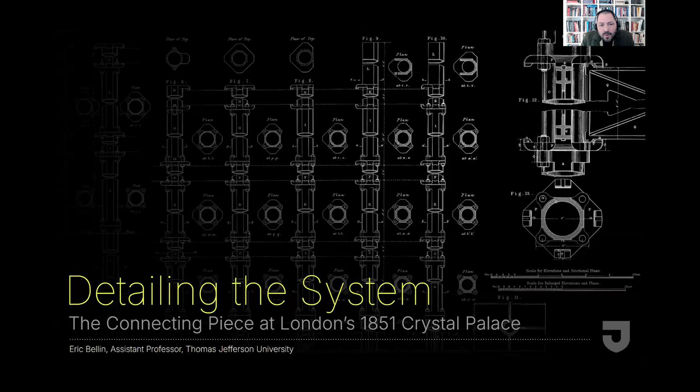So today, I'll talk about one particular detail of the Crystal Palace, the famed iron and glass building constructed in London's Hyde Park for the 1851 Great Exhibition of All Nations. And the detail I'll discuss is centered on a particular building component, a part that the project designers simply called the connecting piece.

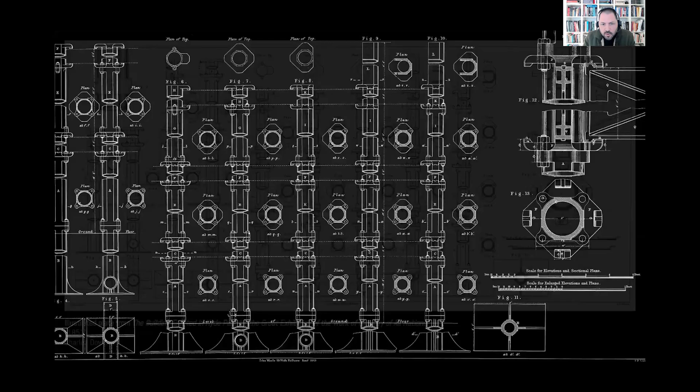The sheet of drawings you see here is a more legible version. It's from a book published in 1851, which collected illustrated plates of the building's technical drawings, transcribed, quote, from the working drawings of the contractors, Fox, Henderson, and Co. Here, in the corner, is the connecting piece, seen in elevation and correlated plan.

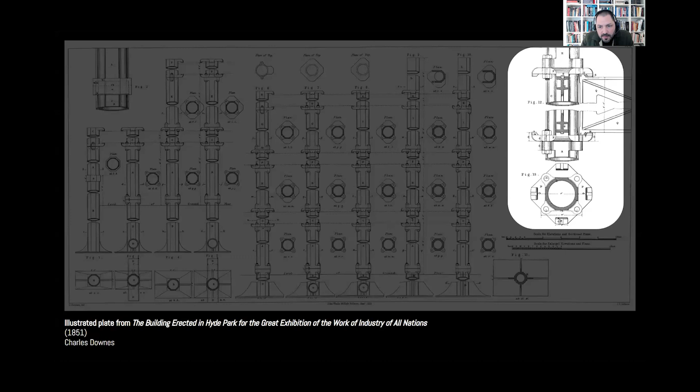The sheet as a whole illustrates the many different ways it was used to connect vertical and horizontal structures, columns and girders, within the building's structural fabric. So today, I'll explain and unpack this one detail of the Crystal Palace, centered on the connecting piece. I'll aim to show how this one detail reveals the ways in which the project's designers conceived, or maybe reconceived, of the building less as a singular discrete object and more as a system itself.

And so I'll tell the story in three parts, beginning with some background on the building.

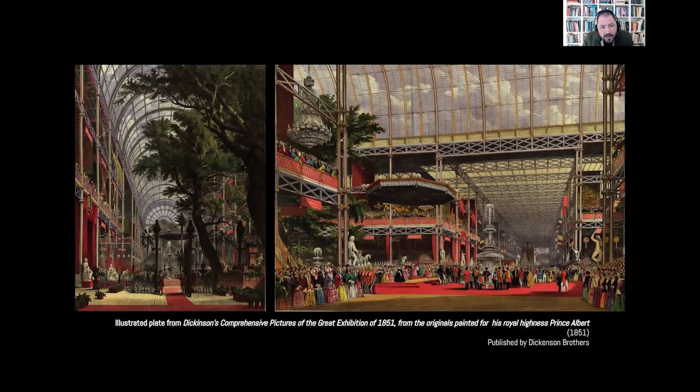For those who might be less familiar with the Crystal Palace, it was built in London's Hyde Park for the 1851 Great Exhibition of All Nations, a sort of World's Fair of industry and material culture. The building was massive. Its interior was over 100 feet tall at its highest point, and it was built right over collections of mature elm trees. The building was essentially a showroom for goods—machines, furniture, decorative arts, crafts, all sorts of things from around the world. More than 40 nations had goods on display. Of course, this was the time of colonialism, so there's a darker side to this, but that's for another presentation.

As for the building itself, at this time in 1851, it was the largest building to have been constructed of iron and glass, and by magnitudes. It contained almost 1 million square feet of interior galleries on a 700,000 square foot building footprint. For comparison, at this point, the other largest iron and glass constructions had been about 40,000 square feet.

Even more amazing is that the Crystal Palace was imagined, designed, fabricated, and assembled in well under a year. Honestly, depending on how you count, you could even argue that it took just over 6 months from design to the completion of construction. Also key was that the building was temporary, set up for the event and then disassembled after, which I'll get to a bit later.

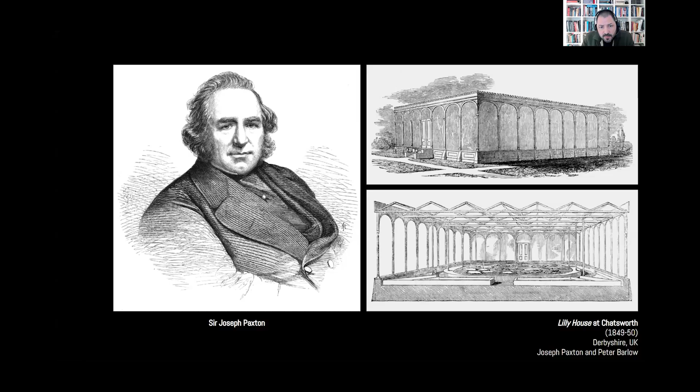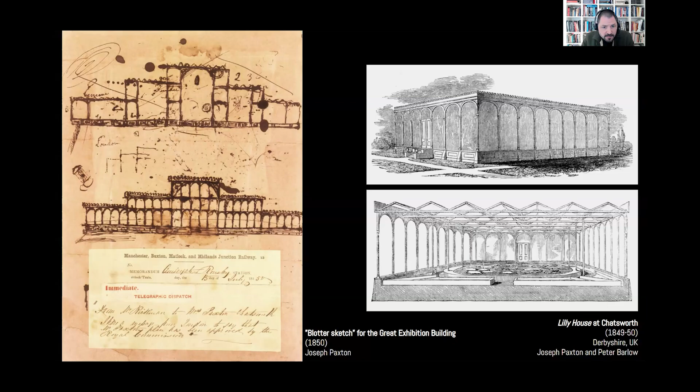He produced this drawing as a more formalized proposal, but at the time this was drawn, this is June of 1850, the opening of the event was just 11 months away in May of the following year, and Paxton had no idea how the project could actually be built in that time.

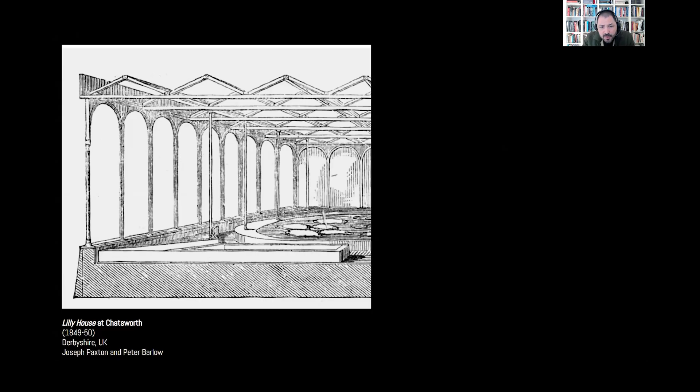With his lily house, joints between iron members were secured with molten iron, and other components were all handcrafted. This tiny project took more than a year to complete. So joints like this one would need to become something far more complex to achieve the expanded scope and speed necessary. And this is where the engineers come into the picture.

On the same day, Paxton formally submitted his proposal for the exhibition building. He also met with the civil engineer Charles Fox of the firm Fox, Henderson & Co., who agreed to collaborate on the project's detailed design, manage all fabrication and production, and serve as contractor overseeing all on-site work.

Over the next few weeks, Paxton and Fox met with glass manufacturers, other engineers associated with Fox, and architects, and the project was refined in a number of ways. Most obvious was the addition of the arched transept at the center of the building, but there was also a careful redefinition of dimensions for the building's structural module, which was based on efficiency of fabrication.

Once the scheme was accepted, based more or less on the schematic drawings you see here, the project was set in motion.

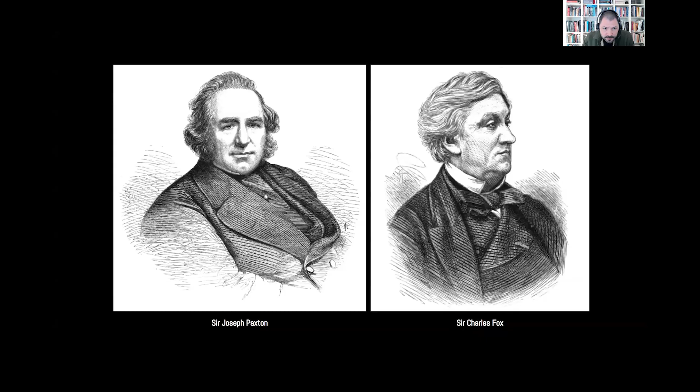Now, at this point, Paxton was, in his own words, quote, obliged to leave England for a month on other business, end quote. This was mid-July. The building needed to be completed by January for the exhibition to open on time, which meant a lot of work remained to turn these very schematic drawings into the largest and most complex construction of iron and glass in human history, in 6 months.

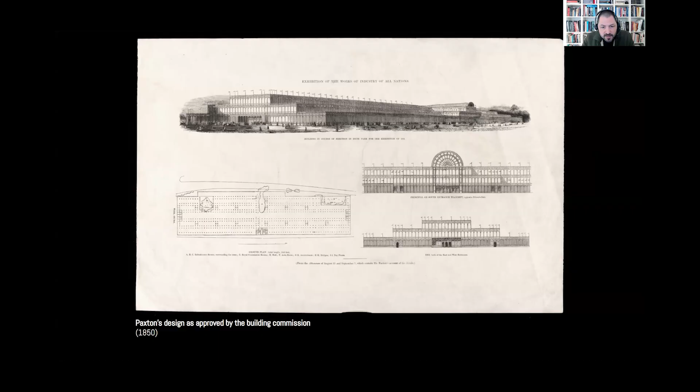About this, Charles Fox commented that at this point the drawings, quote, did not contain either sufficient architectural or mechanical detail to admit of their being used in the execution of the works, end quote. At this time, and in the absence of Paxton, Fox began to work 18 hours a day for 7 weeks to flesh out the project in detail.

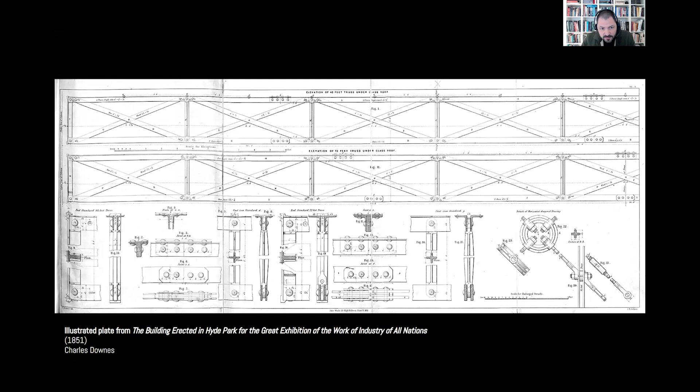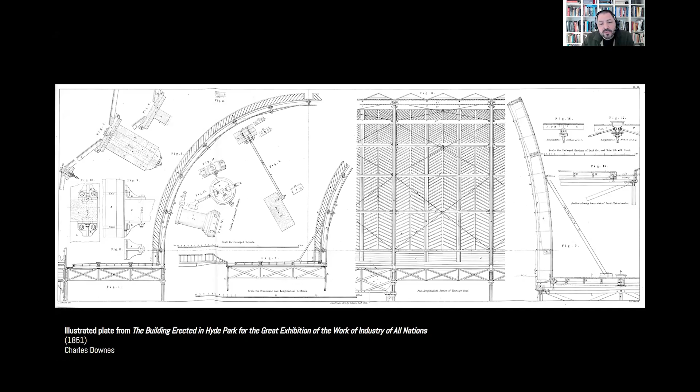In his own words, quote, making every important drawing of the building as constructed with my own hand, end quote. With a small team of engineers assisting him, loads were calculated, parts were dimensioned, and connections were designed, yielding the comprehensive set of technical documents from which the building was actually produced. Basically, a full set of construction drawings for the building with the level of detail you see here.

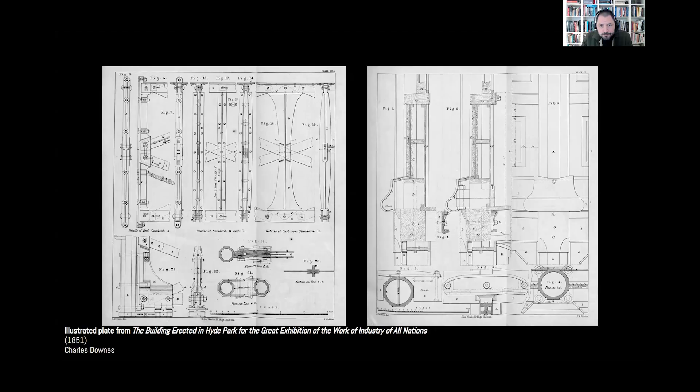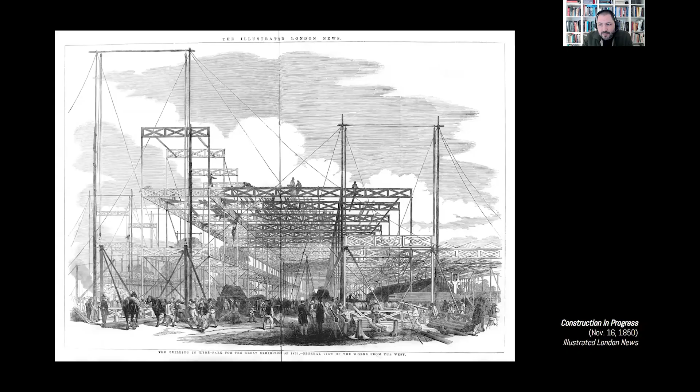It can be argued, and I certainly do, that this involved a large part, if not the majority, of the building's actual design. Further, Fox and Henderson would go on to manage all of the Crystal Palace's phases of manufacture. They forged and fabricated all the ironwork at foundries they and their associates owned or operated, and the same was true for all lumber and millwork. Fox and Henderson's team not only manufactured all the building components, but also handled logistics, prefabrication, managed on-site labor of thousands of workers in 3 shifts working 24 hours a day, and Charles Fox himself served as on-site contractor.

In the course of all this, their team invented scores of new machines and tools to economize work. They managed labor in ways wholly new to construction sites, and they mechanized building practices in ways that wouldn't be matched again for decades.

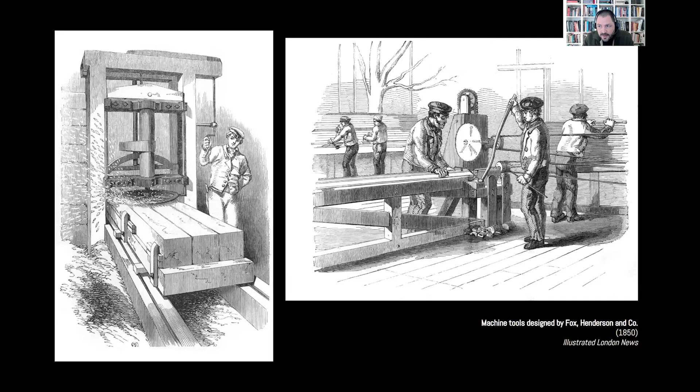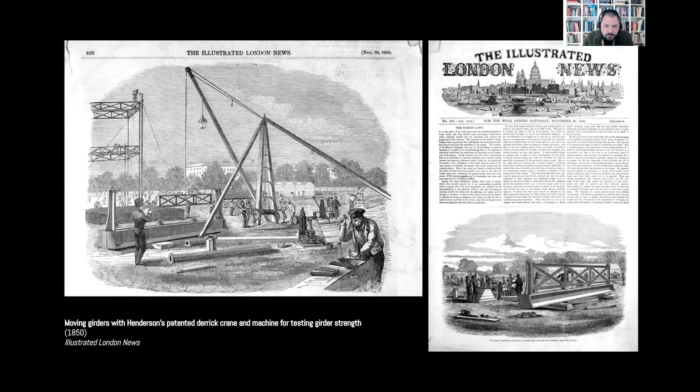They developed new apparatus and methods for materials testing to ensure the safety of what they were constructing. There was a lot of public concern about the safety of this completely new sort of building. And in fact, despite the building's scale and complexity, and that the structure is made of all these custom components, they completed the building and had it ready for the installation of exhibits by January. So this was a building of nearly 1 million square feet made with wholly unprecedented methods of construction that went from design to completion in just 6 months, which is astounding.

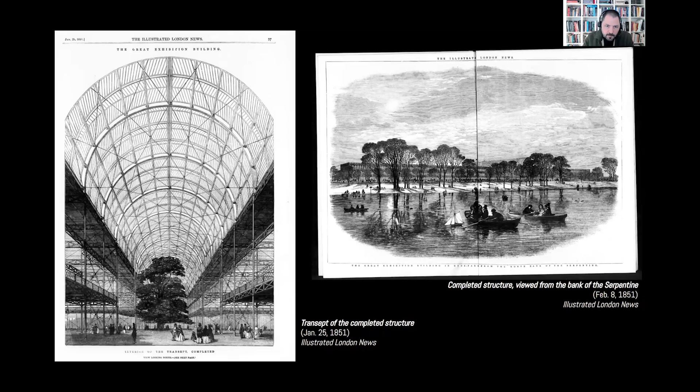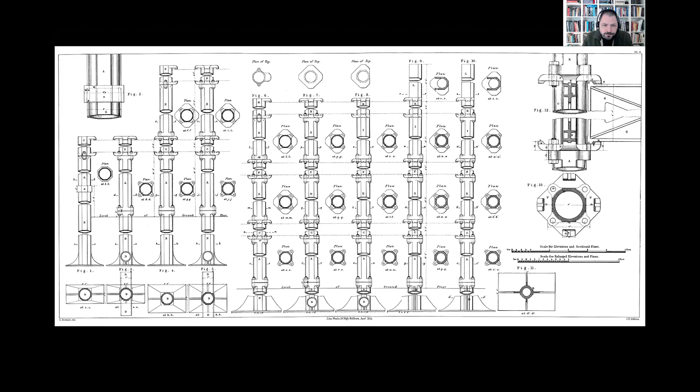Among all the incredible innovations they developed in the course of realizing the Crystal Palace, the connecting piece was absolutely essential to their success. I think this one detail was the most impactful on accelerating the pace of construction. Fox himself commented that he considered the connecting piece to be one of the most important points of the structure. And it undoubtedly was.

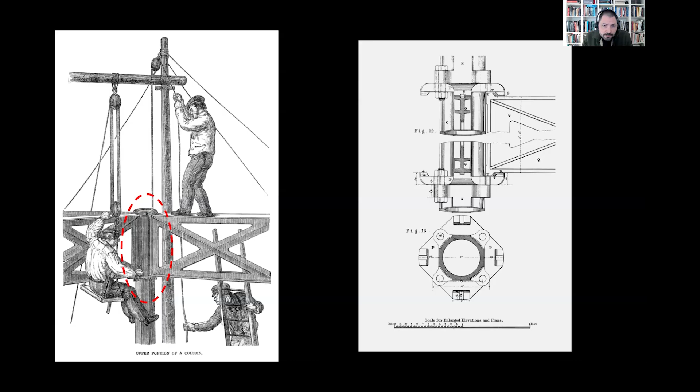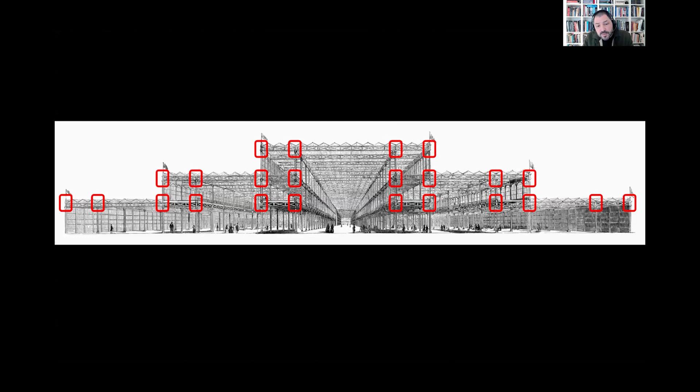The connecting piece was the component used to join individual lengths of tubular iron columns and connect them to the prefabricated trusses and cast iron girders they'd support. Here on the left, you see a connecting piece on top of a length of column, with workers fixing girders at its sides and ready to install another length of column on top. In a single typical cross-section of the Crystal Palace, these were the locations of connecting pieces, so 24 in this one section. In the building as a whole, there were 2,500 connecting pieces, manufactured in about a dozen slight variations. So it was the connecting piece that held together nearly the entirety of the building's structural fabric.

The connecting pieces were cast at Fox and Henderson's Ironworks in Smethwick, while the columns were cast at another foundry outside London, which specialized in the production of iron pipe and was owned by the family of John Cochrane, who was Fox's chief assistant as on-site contractor. Perhaps most importantly, the connecting piece was specifically designed to be installed quickly by unskilled labor.

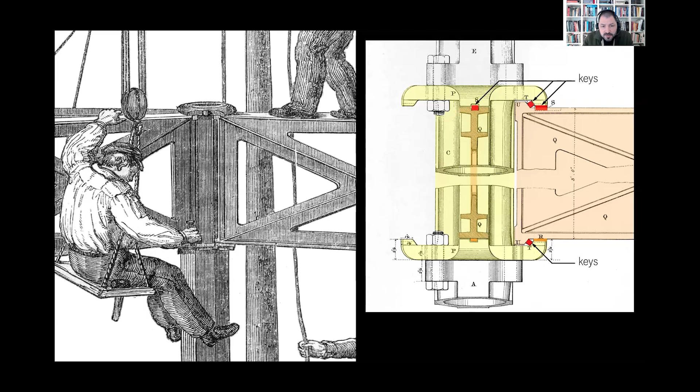Two sets of wrought iron wedges, which they called keys, here you see them in red, were driven in by mallet into the joints between girders and snugs, securing the connection. This process was incredibly fast and required little to no skill. And remember, the building was temporary, so these connections could be easily disassembled later.

Now, this process of assembly and detail weren't based on any precedent in architecture, but rather they had grown from the prior experience of Charles Fox as an engineer, industrialist, and contractor.

As a teen, Fox was apprenticed to the inventor and mechanical engineer John Ericsson of London, and he assisted him with experiments in early rotary engines. Along with the engineer John Braithwaite, they worked on the design and construction of the early steam locomotive, the Novelty, which you see here, and which was famously a leading competitor at the 1829 Rainhill Trials, an early racing competition of steam engines.

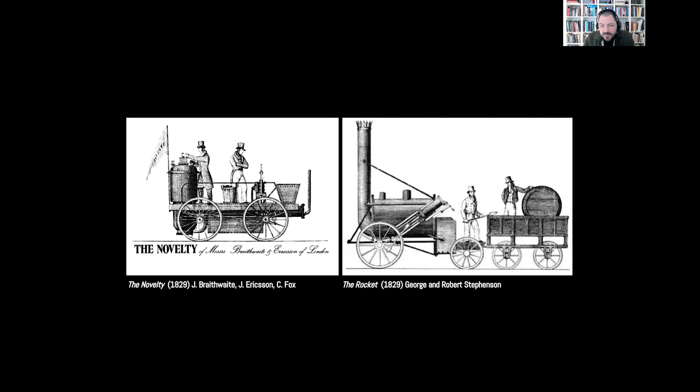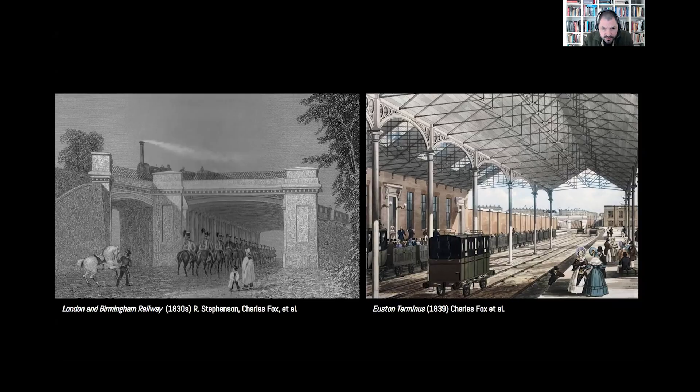By 1833, Fox began working for the British railway pioneer Robert Stephenson, and he spent 5 years as an engineer, contractor, and manager building the London and Birmingham Railway. It involved surveying, management, and the construction of rails, bridges, tunnels, and stations, including the Iron Roof at Euston Terminus.

In 1839, Fox went into partnership with the engineer Francis Bramah, and their company, Bramah Fox & Co., owned and operated their own foundries, produced commercial and industrial iron manufactures, and contracted on a range of industrial building projects. In the 1840s, Fox also patented a number of innovative designs for iron railway components, as well as new processes and machines for iron casting and working.

Then in 1841, John Henderson, owner of a foundry in Smethwick, was brought into the company. When Bramah retired in 1845, the company was renamed Fox Henderson & Co. By 1850, the business had grown substantially. Under Fox and Henderson, the Smethwick works contained, quote, 70 forges, and was stated to be the largest in the world. At this time, the firm was producing about 300 tons of castings a week and usually employed between 1,000 and 2,000 men.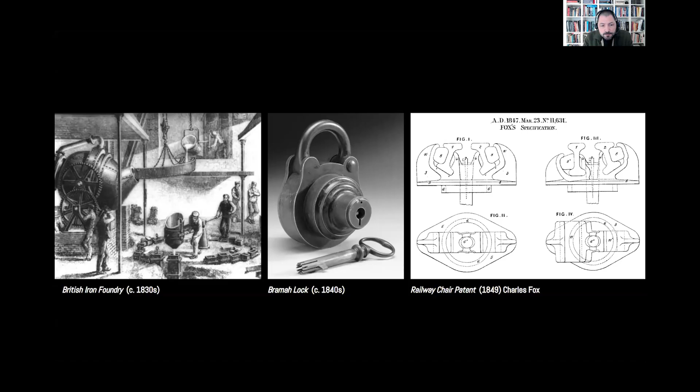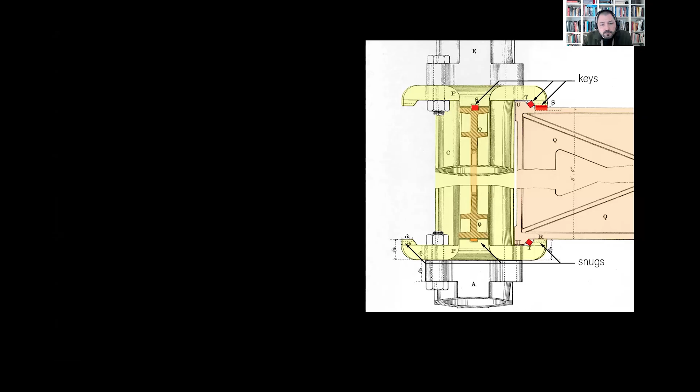Now, with all this in mind, let's come back to the connecting piece and recall the language used to describe its mechanisms. Girders were secured to the connecting piece by way of snugs and keys. These words, at least in the sense used here, were not architectural terms, but rather terms from other disciplines. Snug was a term of mechanical engineering and product manufacturing in iron. It appears in engineering literature from the 1830s on and refers to a projection or ridge cast on a plate or bolt in order to keep something in position or prevent rotation. Snugs were widely employed in manufactures assembled from multiple components in iron, so commercial products, machine tools, and so on.

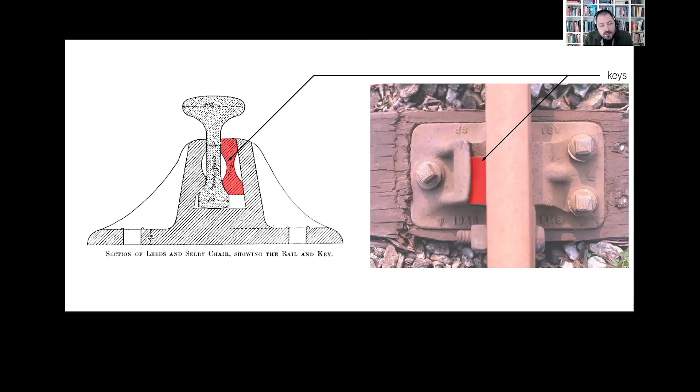As for the term key, in building the Crystal Palace, it was employed in the same sense as in the production of railways. In the construction of permanent way, the tracks on which locomotives ride, the key was a wedge, usually made of iron, which was driven between two elements to secure the relative position. You can see those sorts of keys here in two different railway chairs. In fact, Charles Fox had been granted patents for several railway chairs of his own design. This is one he patented in 1847.

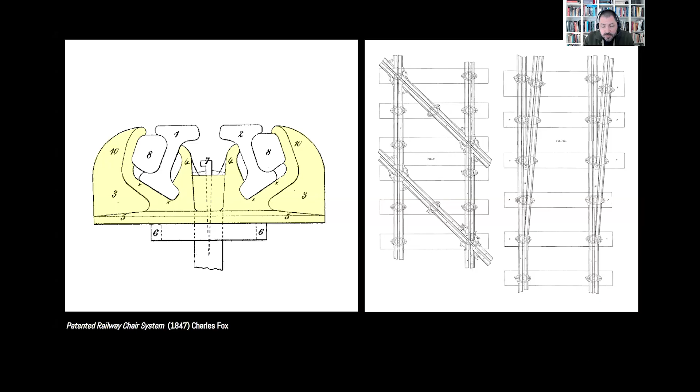If we take a closer look at one of these railway chairs, we see a mass-produced cast iron component designed with snugs, which will hold another component of the system, in this case iron rails, which were then secured in place by driving in iron keys with a mallet.

Now, if we take this railway chair, rotate it 90 degrees, and compare it to the connecting piece, we again see two mass-produced cast iron components which serve to hold, by way of snugs, other elements of their respective systems, securely and firmly held in place by driving in iron keys with a mallet. So in mechanical principles, they are precisely the same.

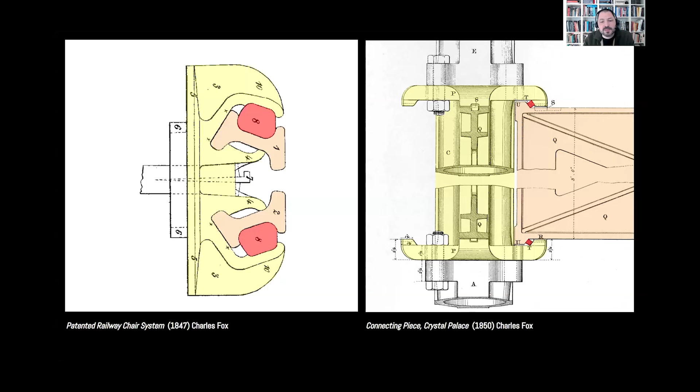So for me, this is a translation of principles from one discipline to another, the transfer of knowledge from railway engineering and industrial product manufacturing into practices of building. And in both cases, we find the design of components, the design of details, which facilitate the efficient and indefinite expansion of their respective systems.

So I've said that the connecting piece reveals the ways its designers thought of the Crystal Palace less as a singular building and more as a system itself. For me, this is most clear in the building's disassembly and afterlife. At the end of the exhibition, the building was taken apart and moved to another site in Sydenham. The same parts were used, but it wasn't simply reconstructed.

In fact, additional components were added. It was expanded in a number of ways. Both its length and width were altered. Additional arch vaults were added. Massing changes were made, and more.

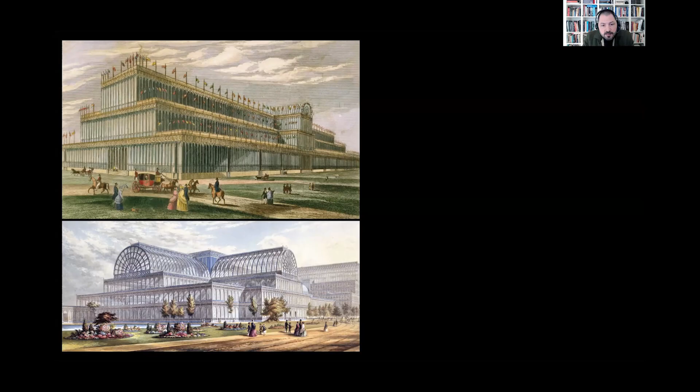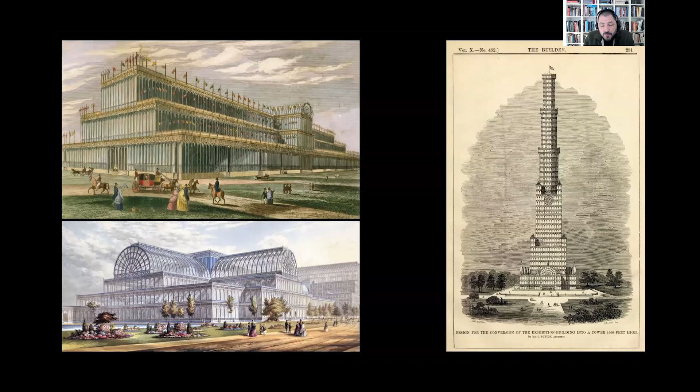And when it was announced that this would be done, that the Crystal Palace would be moved and completely reconfigured or transformed in the process, the Builder, a popular technical magazine in 19th century England, published images which imagine the Crystal Palace's components reassembled into a 1,000-foot tall tower. Its system of components was imagined as redeployed in something wholly different and new.

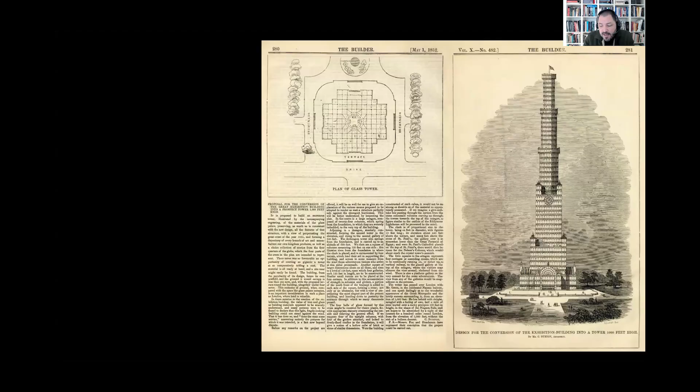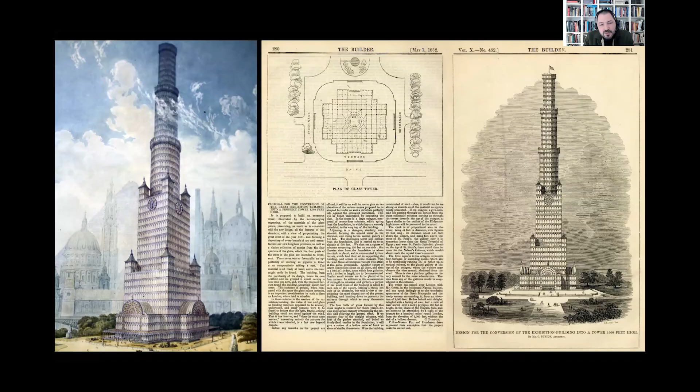Remember, this is more than 30 years before we start seeing skyscrapers in Chicago. And when these images were published, Fox and Henderson commented on them. They said, yes, in principle, a tower like this could be soundly constructed.

So, in theory, one structural bay of the Crystal Palace could be replicated ad infinitum, and the building could be extended indefinitely. Fox and his team had taken Paxton's vision for the building and transformed it into a complex system of manufacture, labor management, and assembly.

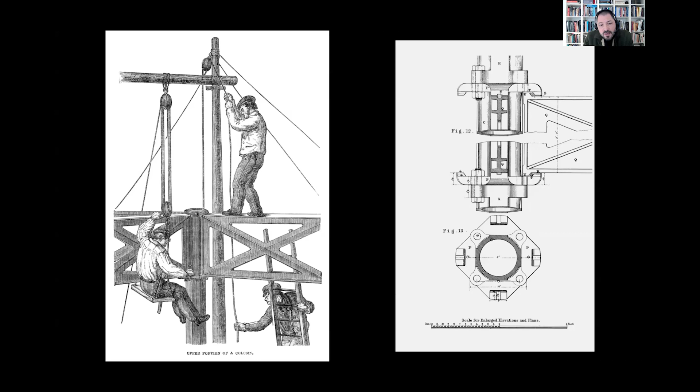They had done this by accounting for the entire process from manufacture to assembly to disassembly and beyond, and designing it into a powerfully instrumental set of construction details. It was this recasting of the building as a system of rationalized, optimized, and economized details that I think made the Crystal Palace's very existence possible. Thanks for listening.

Thank you, Eric. I love the Crystal Palace. That is one of the coolest projects of old, and really a forerunner to the whole concept of design build. Definitely was design build. Anyway, I really appreciate that.

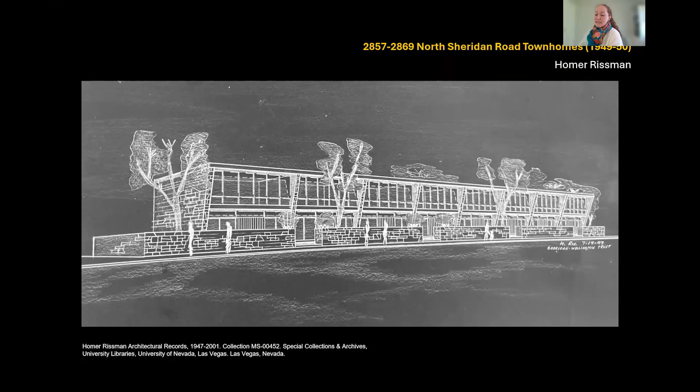This now brings us back to his student, a rather precocious 27-year-old Rissman, whose work was developing, for some reason, just 1 block over on Sheridan Road in parallel to Mies's. Rissman capitalized on opportunities in that post-war environment, namely the need for rapid economical housing solutions.

He operated primarily as an architect developer, designing a series of 4 experimental concrete framed townhome complexes. Rissman invested his own money toward these small iterative projects, and always needing to be attuned to market demands and desires, he would have keenly been aware of where the public sentiment stood with regard to modern materials for residential applications. Thus, in his realized work, we can see where his vision was accepted, or conversely, in his unbuilt work, where acceptance may have been more hesitant.

For context, while the larger 2933 North Sheridan was still under construction, Rissman had already completed this first concrete residential experiment, and it was notably the first completed construction in the entirety of this East Lakeview area after World War II. So this is his preliminary sketch from 1949, and as it stands today, with some modifications from various owners over time.

But these first townhomes show that for Rissman's early experimentation with concrete construction, he used concrete block and precast concrete girder structural framing. Interestingly, though, for this first construction, Rissman chose to conceal the concrete framing behind a limestone and clapboard street-facing facade, not yet ready exactly to expose the structure.

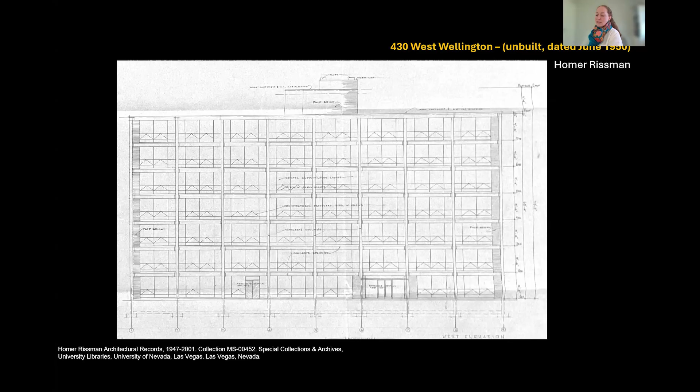The drawings showed something really curious. Here, Rissman included fully exposed concrete columns and girder details, structurally expressive, and in looking retrospectively, they were really quite far ahead of their time.

So this is such a small detail, you can see how I nearly missed it. But if you look here at the exterior exposed concrete column detail, Rissman has taken Mies's concept, but inverted it so that the stepped feature is actually at the rear portion of the column. In order to fully express this, he recessed the facade plane, which leaves a small void space. I think at most it was about 1.5 feet. It's not too much, but it increased in depth as the eye travels up the building.

was a typical one for Chicago, very narrow at 25 feet, yet deep all the way through the alleyway. And unconventionally here, Rissman rotates the building entrance 90 degrees from normal street-facing orientation, turning the main facade toward a narrow courtyard for more privacy. Now, this side elevation that you see is the one that actually would be facing the public street and sort of helps to hint at the emphasis that he wanted to create for this unique oblique view of the concrete structure.

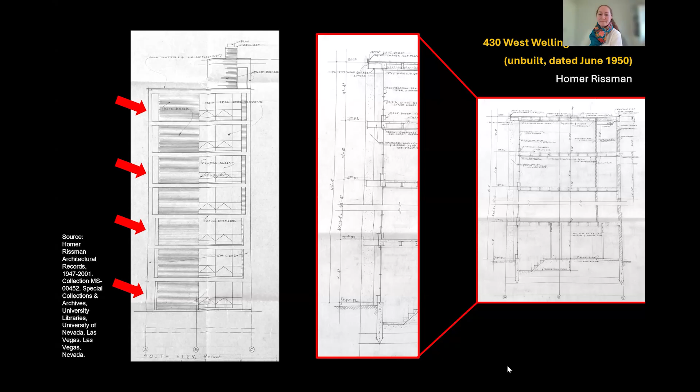In taking a deeper look, I noted that it was not just an exposed column, but in recessing the facade, Rissman exposed the girder connections at each floor level as well. It's a little difficult to make out, but the section detail shows a typical girder extending beyond the recessed facade plane, grabbing the column in what I've described as a lobster claw.

Now, this may seem like a minor detail, but it really speaks volumes about his approach. He's further pushing boundaries of tectonic expression by using the structure as an architecturally aesthetic tool. More importantly, Mies's introduction of a design innovation at Promontory Apartments then tasked further architects with diffusing the idea and ultimately making it accepted. This societal shift appears to have happened only gradually, and yet these drawings show Rissman was one of the first to take on the challenge of manipulating a concrete exterior in this way.

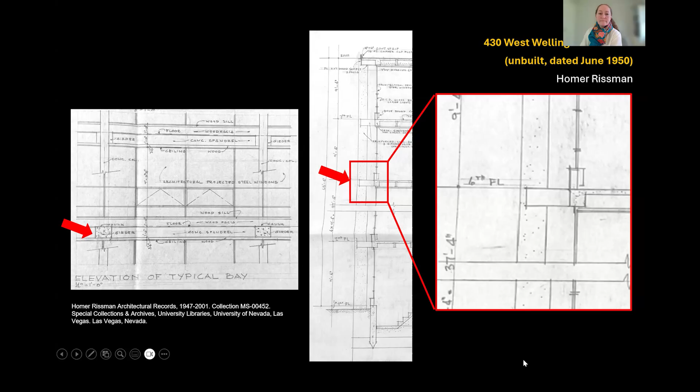To understand whether Rissman's design was part of a broader emerging trend, I tried investigating potential precedents that might have influenced his thinking, even hybrids where social forces sought economy while beginning to accept structure as an aesthetic form.

And it just so happens that while researching one of Rissman's townhome constructions, you can see in the foreground, I happened to notice a mid-rise residential building in the background of a construction photo, located in the rear along Briar Street. I noted the exposed concrete frame and brick infill at the non-street facing elevations. When I looked to the street facing facade, I realized this was a great example of a hybrid, hesitant to fully break free from traditional ornament.

Built during the Depression in 1936, one can see the economical use of exposed concrete block ornamented with some decorative cast stone and then brick masonry, a stepping stone to the future abandonment of ornament and the acceptance to come shortly of a new structural aesthetic.

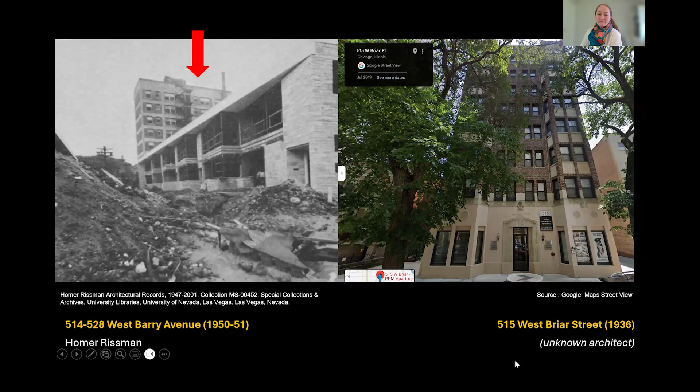Now, this example sparked my curiosity whether there were other signs, maybe before the war, that would indicate a trajectory of this acceptance to come. Due to the scarcity of new construction during the war, I decided to review the pre-war designs, namely looking to pavilions at the 1939-40 World's Fair in New York, because designers were typically motivated to use cutting-edge concepts.

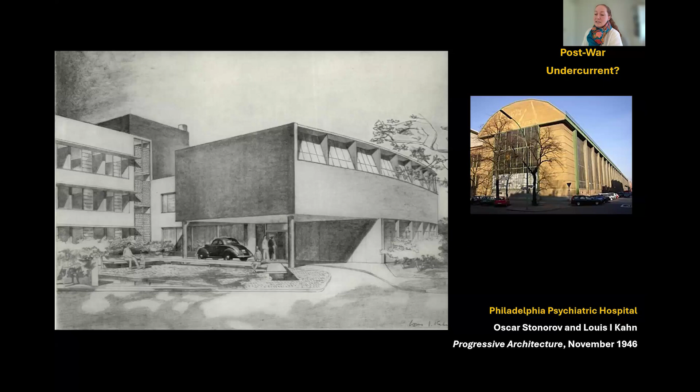Or possibly this concept sketch for the Philadelphia Psychiatric Hospital by Stonorov and Lou Kahn, which includes a slanted glass facade revealing structure aesthetically, a la Peter Behrens' modernist AEG factory masterpiece.

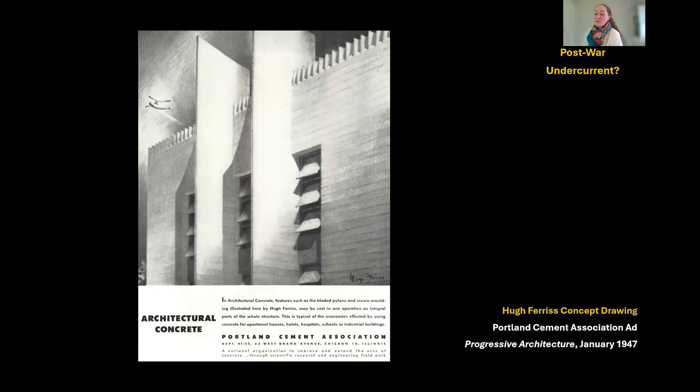By 1947 issues, I discovered an advertisement by the Portland Cement Association displaying an undated Hugh Ferriss concept drawing with rather expressive, exposed, and even pointy concrete pylons. An ad that touts the economy of using concrete, but more importantly, specifically called out such use for apartment houses.

Now, unlike Mies, who benefited from the support of prominent developers and institutional backing, Rissman was just an independent and, might I add, very young architect builder navigating real-world constraints. His innovative proposals had to survive the filter of the public, not to mention investor acceptance, at a time when exposed concrete had not yet gained acceptance as a residential material.

As such, his Wellington work reflects not only the promise of a new design paradigm, but also the challenges of propagating them without the weight of a well-known name. Still, it's telling and instructive that figures like Rissman were already testing out the idea. Noteworthy are not only designs successfully constructed, but what is ultimately not built.

In the case of Rissman's post-war experimentation, he was young, daring, and trying his hand at all types of constructions. Those projects larger in scale than the townhome complexes did not become realized. And to me, this indicates there was possibly not a consensus yet accepting this novel approach by a little-known designer, presumably resulting in a lack of financial backing.

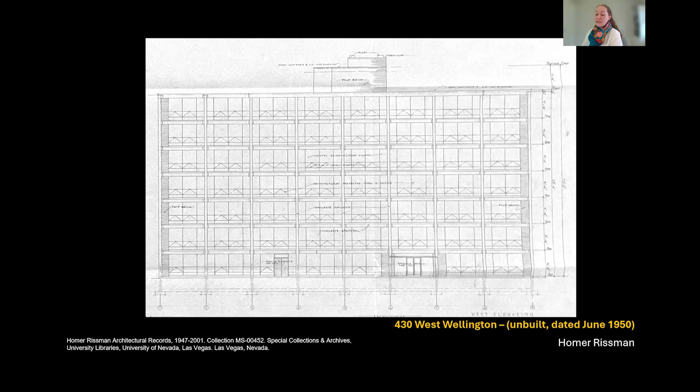Now, I speculate this because what was ultimately built at the site still stands today. Apparently, Rissman's proposal lost out to another architect's design, one for a set of townhomes constructed with rather traditional masonry and wood framing.

Seeing that Rissman was at the leading edge of this trend in 1950, I wanted to track how this design approach eventually became evident in the mainstream over the subsequent years. The first built example I could find in Chicago was a residential high-rise building at 5740 North Sheridan by J. Marion Gutnayer, completed in 1962, approximately 10 years after Rissman's mid-rise design.

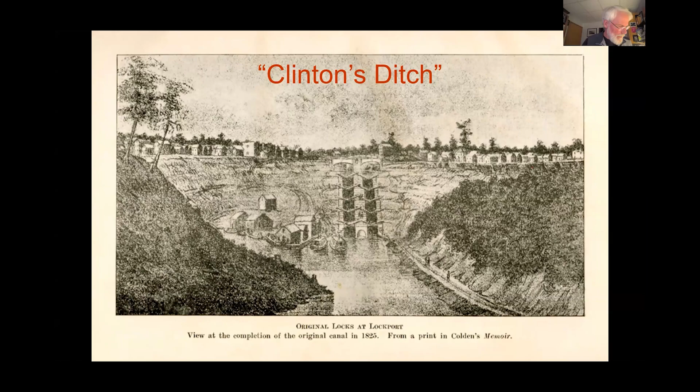The whole event was celebrated in 1825 by Governor Clinton, who was governor at that time, and who boarded the Seneca Chief, a steamship that was able to navigate the entirety of the canal, starting in western New York, all the way through for over 8 days to get to New York City. He brought with him a bucket of water from Lake Erie and then dumped it into the Hudson Bay right by Sandy Hook.

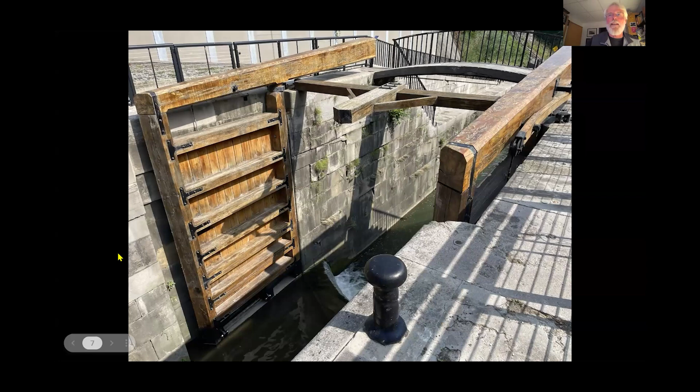If you ever have a chance to visit Lockport, I highly recommend you visit the locks. There's been multiple reconstructions of the Erie Canal over the years to accommodate larger boats, and this is an example of the restored lock gates at one of the 5-step locks in Lockport, shown here from the lower view. These gates would close and the chamber would fill with water to raise the boat.